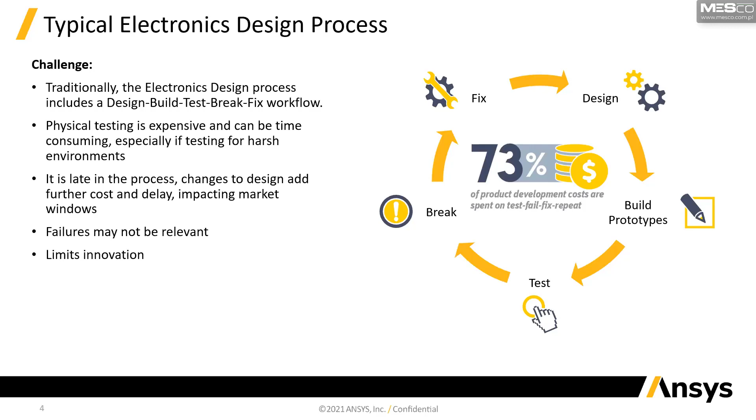And as a consequence, when it comes to producing reliability estimations for the product, these tend to be proven through this cycle or through an amalgamation of MTBF figures for components used in the design. What's really needed is the ability to reduce the number of test cycles and predict the failures early in the design phase using simulation, and gain back some of the time spent within this cycle, perhaps to innovate and develop new ideas. And this is where ANSYS Sherlock comes in. Sherlock uses physics equations and materials knowledge to provide a reliability analysis of the design before you get to prototype.

So just to be clear, Sherlock is looking at the mechanical shock and vibration and thermal risk to the board, the components and the solder joints on the board itself. It's mechanically induced failures, the reliability physics. And Sherlock builds on the information that's produced by the ECAD tools, so the Altiums or the Allegros and the PCB design tools. And through simulation, considering the environment in which the design is going to operate, it calculates a time to failure or reliability prediction for the printed circuit board assembly.

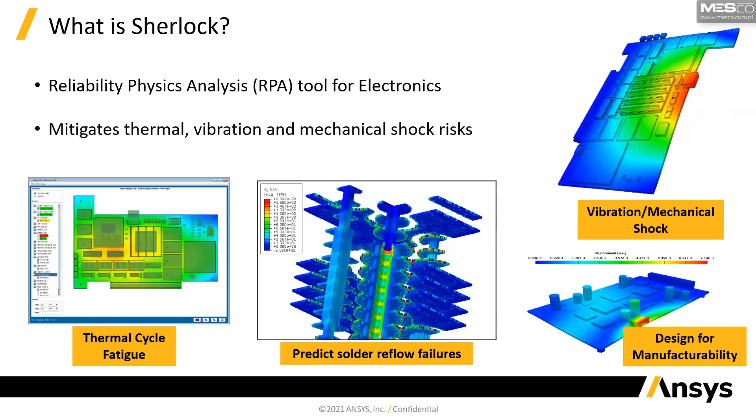What Sherlock isn't is a set of actuarial lookup tables based on MTBF figures. MTBF figures have been used for many years, and they're often empirical calculations from tests which are quite historic, based on uniform random failures and averaged over time, giving a constant failure rate. And this just isn't accurate, nor does it really reflect how a device operates in a changing real-world nonlinear environment.

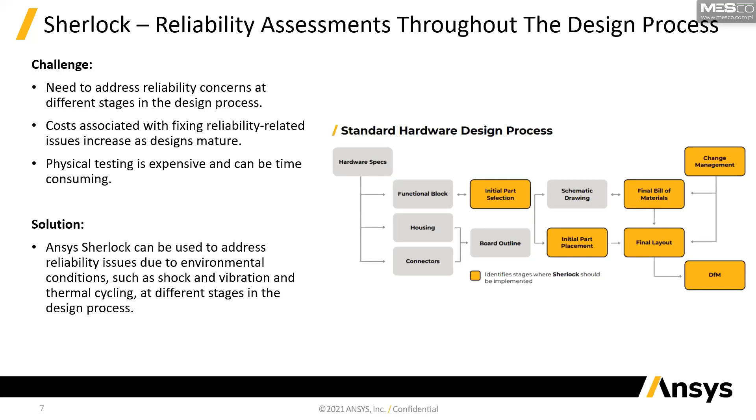So let's look at the process in a little bit more detail. A key component of Sherlock is the pre-processing capability, coupled with a huge component and material library. Often companies that are looking at reliability analysis for their products are already using simulations such as mechanical finite element analysis tools. And this actually can be quite a painful process, especially for PCBs, because while FEA is powerful, it's very broad, needs lots of inputs, often expertise.

And for a printed circuit board, you've got all of those components, all of the different materials of the components, the material of the board, and just the physical construct of it and how it's all put together. So it can lead to quite a complex process to create a PCB model in a mechanical analysis tool with all that material data and so on.

With Sherlock, you simply read in the ECAD file that's generated by the PCB layout tool. And within a few seconds to just a few minutes, Sherlock will virtually manufacture that printed circuit board into a 3D model. And the benefit here is our libraries. We have hundreds of thousands of components with all the material properties and sizes and dimensions associated, and we're adding new ones all the time. And Sherlock will equip the printed circuit board virtual prototype, if you like, with this data, from the stack up to whatever BGAs or QFN packages you might have.

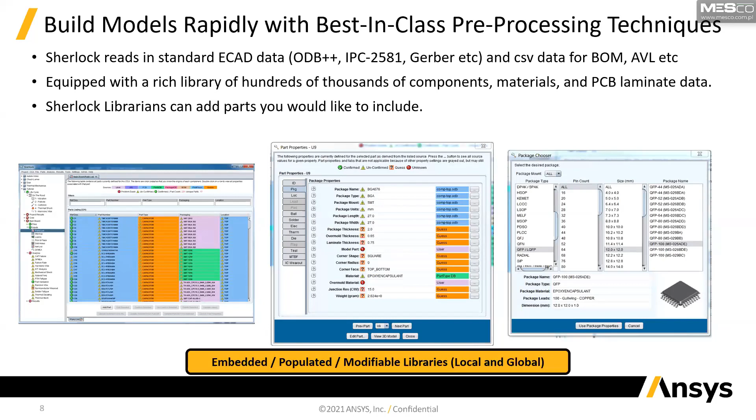The library is modifiable, so you can add to it at any time. Sorry, skip the slide. You can add to it at any time by yourself, or in fact, there is a team of librarians based in ANSYS who will take a bill of materials and create a series of models and components and send these back to you, so you have them available for your analysis itself.

Once you've got the board imported and a 3D model with all the components and material data assigned, the next step is to characterize your life cycle and the loads that the board is going to experience. These can be thermal, mechanical, or shock loads in the form of curves, or you can use industry standards, or loads that you use in your test suite, or even customer-specific loads as inputs for the analysis loading. And here, Sherlock will provide a GUI for helping you to define the curves, or as I say, they can be imported from text files or Excel files.

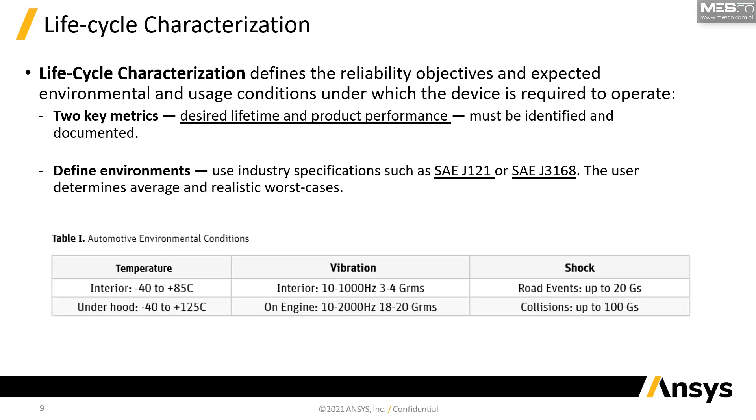And the reliability expectation is entered as a goal as well. This could be the requirement that you have of 5% failure rate over a number of cycles of operation, which characterizes the minimum operational lifetime that you want to achieve for your PCB. So with that all set up, with the virtual prototype, with the loading and the requirements, it's then time to actually do the analysis itself.

So there are several inbuilt analysis types within Sherlock in order to assess the reliability aspects of the board. The most common is solder fatigue due to thermal changes over the expected lifetime. So here, for each cycle the board is subjected to, there will be the expansion and the contraction of solder material, which over time and due to creep will cause fatigue within the solder and eventual breakdown. And what Sherlock is doing is calculating the time until that actually happens.

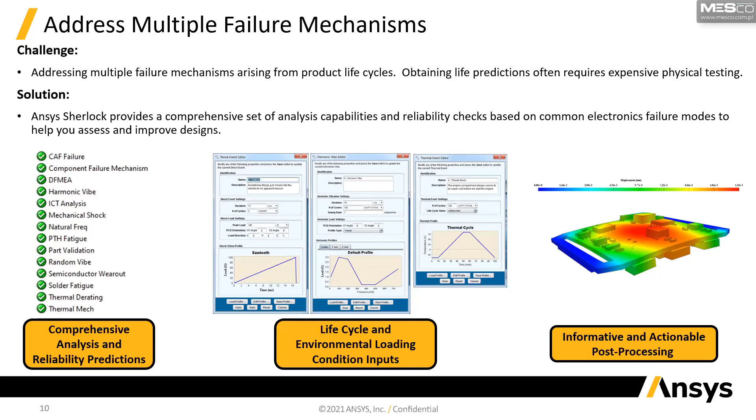Okay. So a typical example of this might be running a shock and vibration test. You have your generated 3D model, you have your sample shock profile, you apply that within the simulation. You can look at a displacement plot and see how much the board will bend under that shock. And you can start to look at a table which shows the individual components and which components are actually failing because of that. You can look at the life cycle prediction of the components of the board and understand where the problem is. And then you could start to run what-if analysis.

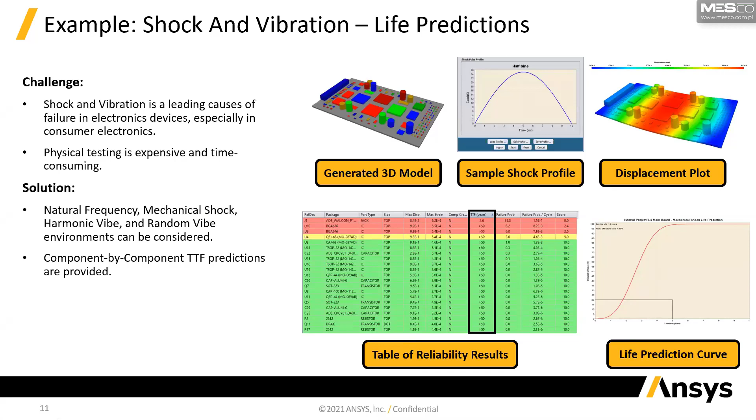And to show you some of this, I'm now going to pass across to Dan, who's going to show you how we import the ECAD, look at the bill of materials and associate it with the libraries, look at the component data, show the loading curves, run some simulations, look at the results, and do some analysis and so on. Okay, so Dan, over to you. Great.

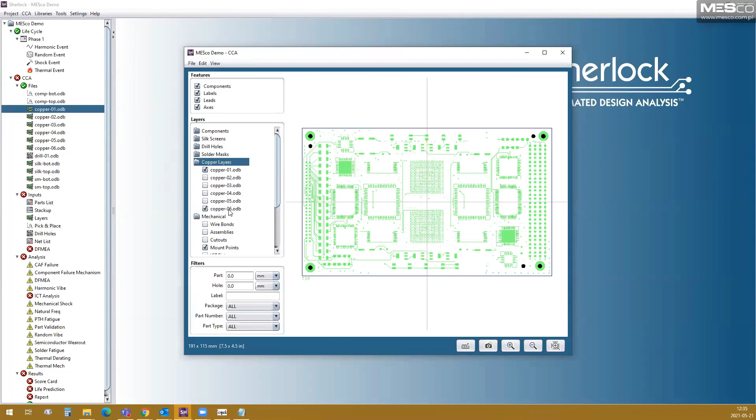As I said, all the components are in their spots. And these files here are not the ODB files; they are translated files that Sherlock has put into useful form for it.

The next bit of information we have, of course, is the stack up. This is the information that came in from the ODB files that has to do with the PCB. It's an 11-layer board. One of the great advantages is it has the copper percentage per area, based on the artwork that it found in the layer files.

And so that will change, of course, what the material properties are for each of these copper layers, because they're not 100% copper. If you remember, this one's 94.7, that was copper 2. You can see that one's almost completely covered. And that changes the effective material properties. These are close to actual just copper. But when copper is only 15%, it has different properties because then it's more copper resin.

This is important because here at the top, you see you have general effective properties calculated for your PCB. This is useful in a lot of different ways. You can see this later when we do a what-if analysis and change some things to try to increase the reliability of our board. Here you can see what changes you do, like say the in-plane and out-of-plane coefficient of thermal expansion of the board, that will help your solder joint reliability and things like that.

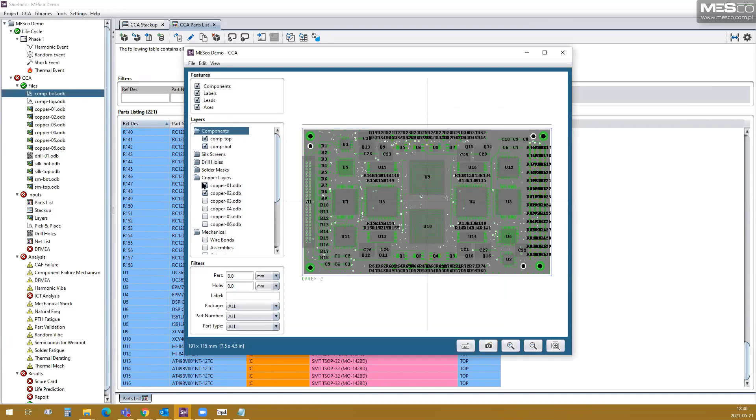There are other variations, you can get into the manufacturer and part numbers, and we can talk about that later. But for right now, you can see that a lot of these packages were figured out. Most of the things that come in on your board, when you look at the components, a lot of your RLCs, your resistors, your capacitors, most of the stuff on your board usually is going to be standard stuff, right?

A lot of the hard work is going to come in later with your ICs and your BGAs, when you really have any application-specific things, any new or interesting components that you are worried about. It's also generally where the focus is when you're running your analysis anyway. It's not on the simple RLCs.

But that being said, we want everything to come in and everything to be filed correctly. Now with the library synchronizer, you're going to have two libraries. You have your own local part library that you can save either on your computer or maybe a company server. And you have the Sherlock part library.

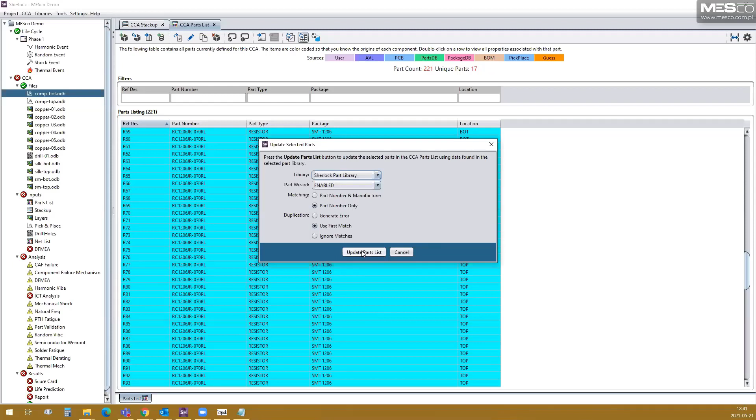And as Andrew said, the Sherlock part library is maintained by our librarians. It's got a lot of stuff in there and it's always growing, especially when people send in bills of material, like he said, to have them created as specific Sherlock library entries where everything's filed correctly with all the parts that we were looking

at before. Let's look at all of the dimensions and the mount type and what kind of ends it has and what the material is made out of. You can have all this done by librarians if you can't find it in the Sherlock part library. But it's not always just that it's not found in the part library. Let me see. It would be good if we looked at part libraries.

So let's open up the Sherlock part library. Oh, this is left over from before. So if you look for an exact match of one of the parts that was in here, I think it was this, exact match, and we list the parts. There are no parts found for this, but this part is in our list. And in fact, this part came out as green because also in the background, the

part wizard patterns. Now, there's another part of Sherlock that looks at parts and says, okay, I don't know this exact part, I know part of this part. Which I'll show you, you look for the prefix match. And you see, okay, so this is a capacitor from AVX. We didn't get the exact ending, but this part comes in a pattern. They name their parts with patterns.

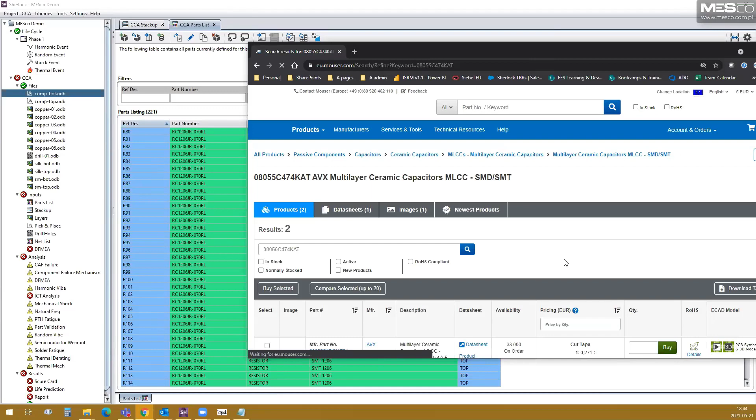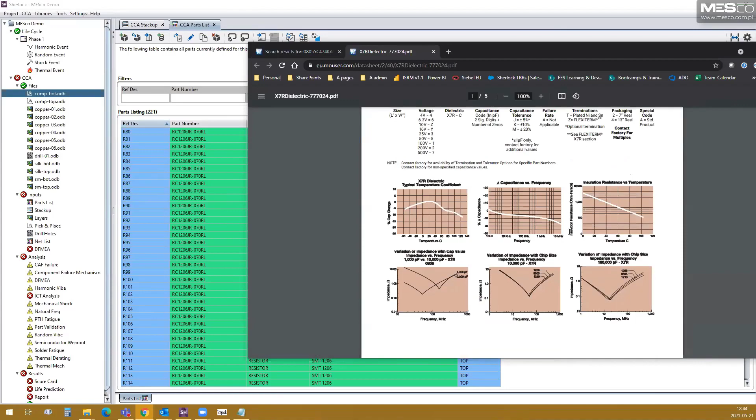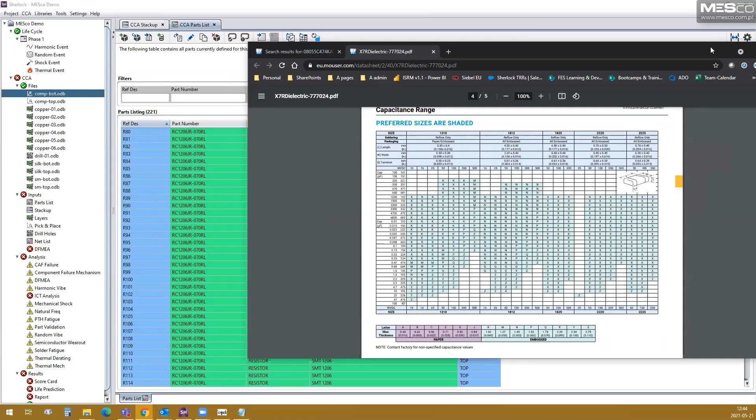So you just come here to Mouser and then grab the data sheet, open up the data sheet, and like I said, here's the pattern for AVX naming, which is why Sherlock already knew what it was. And then you can go in here. Usually, this is a simple RC, so the schematic is not that crazy. But then you get the dimensions from this, and you can go into Sherlock and fill in your own parts if you have to.

But generally, with a project, that's only going to be a couple. Most of them are going to come in from the part library, and especially after you've done a couple of projects, even your local library is going to cover most of it. So at this point, we haven't actually done much work. I'm just showing you how it works. But here, we've taken in our ODB file, we've taken in our parts list, we've synced our parts list with the part library, and we're almost ready to do our analysis.

The only thing is up here, of course, this life cycle that I was talking about at the beginning. This is where you set up the events that you're going to use, the loads for your analysis. We'll look at the thermal event here because I want to do a solder joint fatigue analysis. This is the standard one that comes in. You can edit it. You can change the minimum temperature, maximum temperature, dwell time in each, either by hand or, I think, by drag and drop.

And also load. You can save your own library of life cycles that you use for most of your projects, save them in your profiles, and then pull them up for each of your projects if you want. A lot of Sherlock stuff is done with CSVs and text-based files. So let's see, where is this? This is in data.

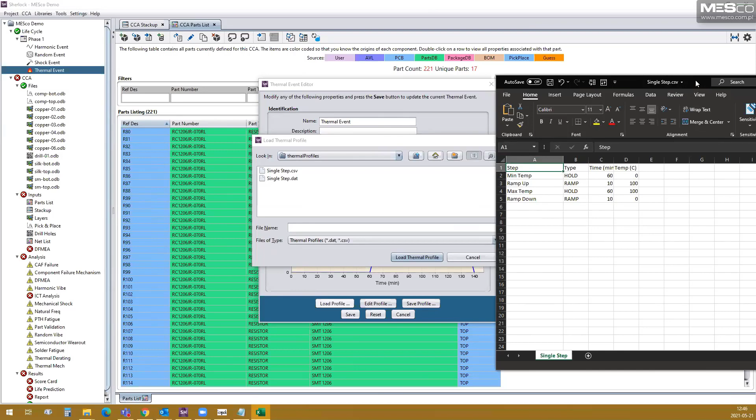Right. So if we look at the CSV, you can see it opens. This is just a standard CSV of a table of values, and you can make your own here. You can have Excel spreadsheets based on your loading profiles, or if you're in automotive and you have different requirements for different regions, different loading profiles and different use cases.

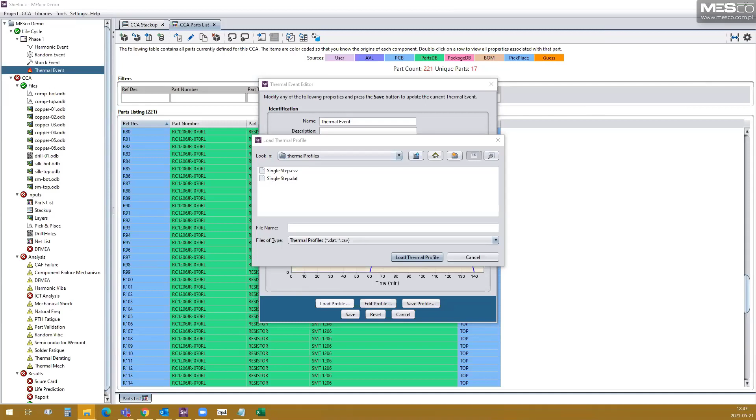Maybe you have storage. You have to do a thermal event of storage in a garage, and then a different thermal event for your average daily use. You can save all of these as spreadsheets and modify things and use them a lot easier that way. So we have this. You can even set your phases. This is phase 1, it lasts 10 years, and it does one 10-year time.

We can add a life phase, say storage. Let me set the time, not milliseconds, that would be ridiculous, 1 year. So this is a storage profile. What do we add? Let's duplicate this thermal event and say that's storage. Well, that's fine, we can do it there too.

This is so you can control the properties if you want to use them separately. Say we do 1 storage and 1 operation per day. If you did 1 storage and 10 operations per day, you can have them in different phases. At the very top for your life cycles, and this is that box Andrew was talking about on the results curve, you say your metric is under 20% probability of failure within 10 years. That doesn't change anything in the analysis, but it changes how the results are displayed, that box and the color coding.

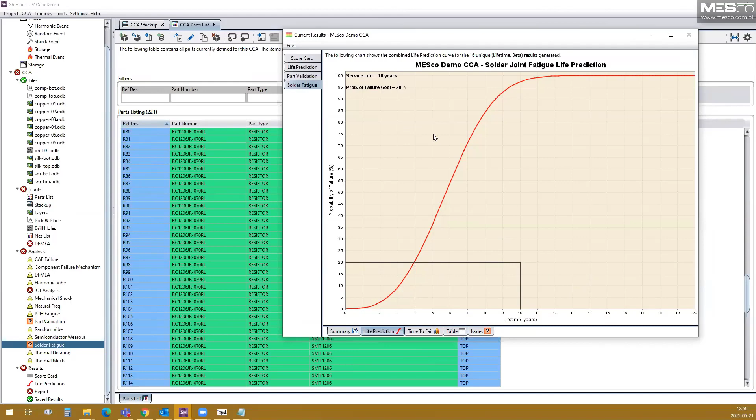You can also look at, by the way, so you have the red ones, which are the ones that tell you that these are your bad parts. The yellow ones are questionable; they're on the borderline. And the green ones, of course, are good. You can also grab a bunch and then say, well, let's look at just their life prediction. Well, that one was great. That one is underneath the 20% line before 10 years is up. But then, of course, the red ones, not so good.

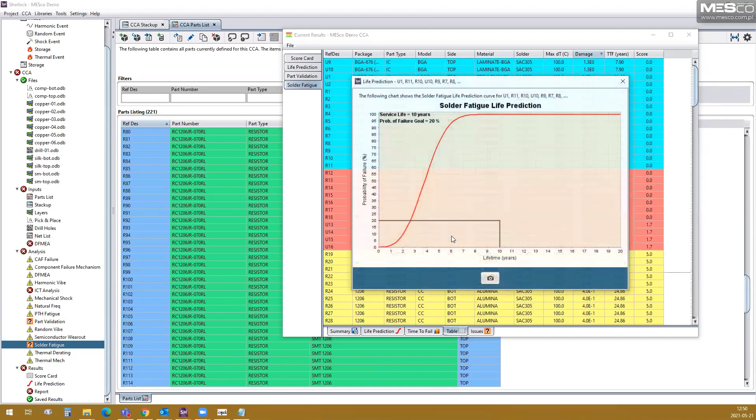And let's see, let me run this. It'd be easier. We could run storage, and then we can look at cycles to failure because there's only 1 cycle that we're running. See here, now it has how many cycles to failure for each of them and how much that translated into years. That's just because of the math that we put at the life cycle of basically how many cycles we are doing per year. And then of course, when we did one less thing, the only problem parts now are our U9 and U10 BGAs.

So let's save this. You can save results, give it a name. And then this is when you can get into your what-if analysis that Andrew was talking about earlier. Let's close this. This is our current results window, and we'll open this in our results viewer to have next to us while we do some changes.

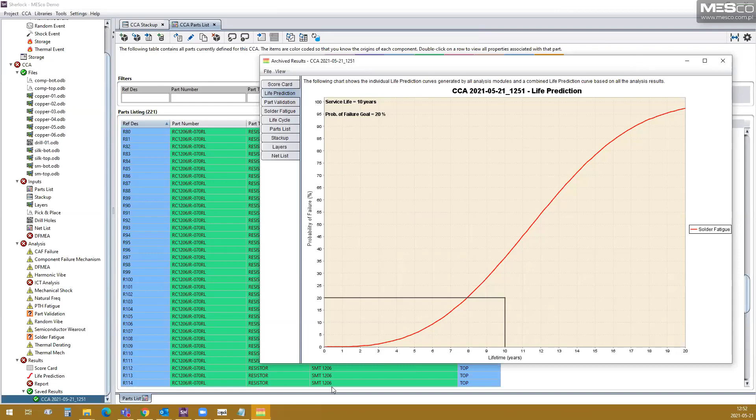It's a great little results viewer. You can also export these and look at them externally outside of Sherlock, where people can look at the different curves that you have. We only did one, so we only have one curve. Andrew showed you in a previous PowerPoint that you will have one curve for each of the analysis sections you run, and then the combined curve that shows your overall, which is a statistical combination of the other ones. We did solder fatigue, and here's our table.

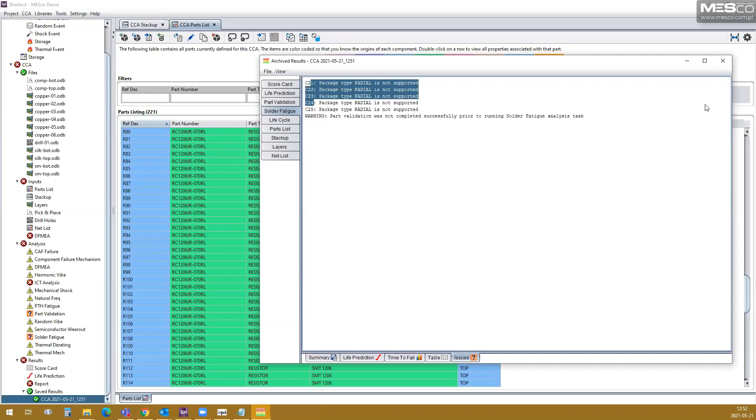By the way, issues: sometimes I didn't check the package types for some of these. It's marked as radial. These are some of the things that you can edit while you're going through your parts list to make sure everything goes properly. But these small capacitors, I wasn't checking those anyway because I knew from experience with my own products that this wasn't my problem area.

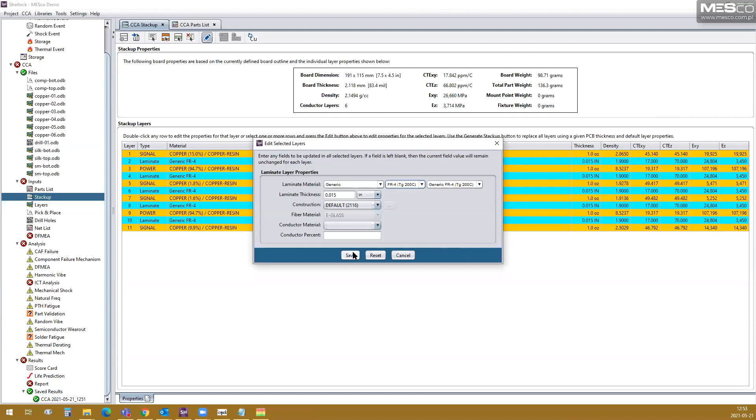So we have these saved analyses, and we could go back to our stack up and say, what if we grab all of our laminates and edit them, and instead of just our regular generic FR4, we went with an FR4 with a higher glass transition temperature? Maybe that helps our situation. Just save right there. Everything's been changed. Then go back to our solder fatigue, run analysis, save and run.

It's done. Now you can see we've already improved; some of our danger zone resistors are out of the danger zone. They're in the green now. We still have a problem with our BGAs, but we've already seen an improvement of our design in just a couple of seconds.

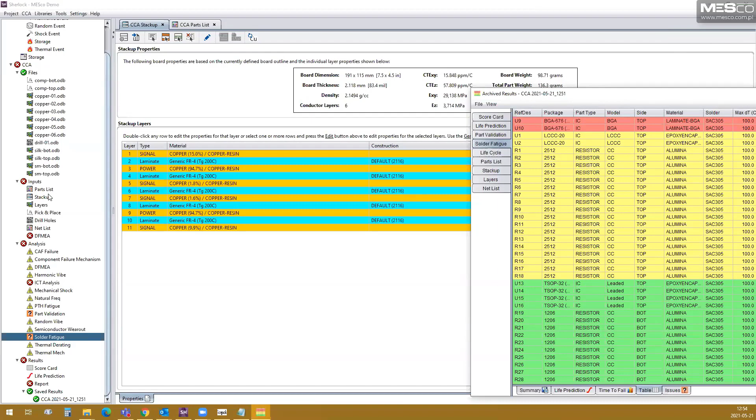There are other things you can do, like in your parts list. Those were BGAs. Who was in trouble? 9 and 10. These guys are both the same 676 BGAs. Like I said before, a lot of this also has to do with the precision that you have at the time when you do the analysis. These are standard dimensions for a BGA of this size and number.

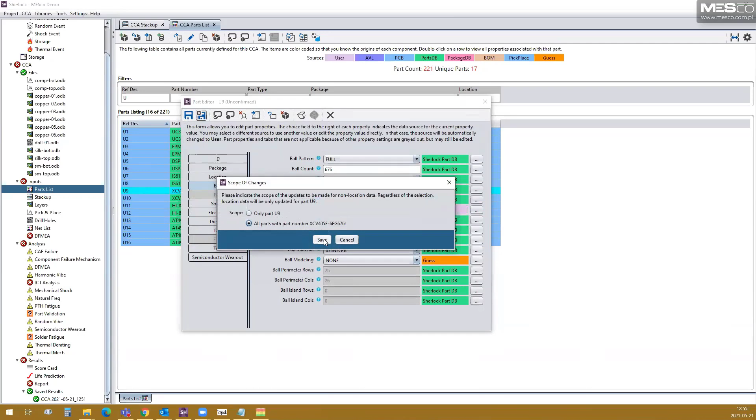You could say, well, you did your failure analysis once you had some components and found that the ball diameter, this is on the package and this is on the pad, maybe the package diameter was in fact 0.5 and not 0.4. Then you save that, and it's for both of those. I was editing U9, but U9 is the same as everything with this part number, so change all of them. Then we go right back to solder fatigue and run it again.

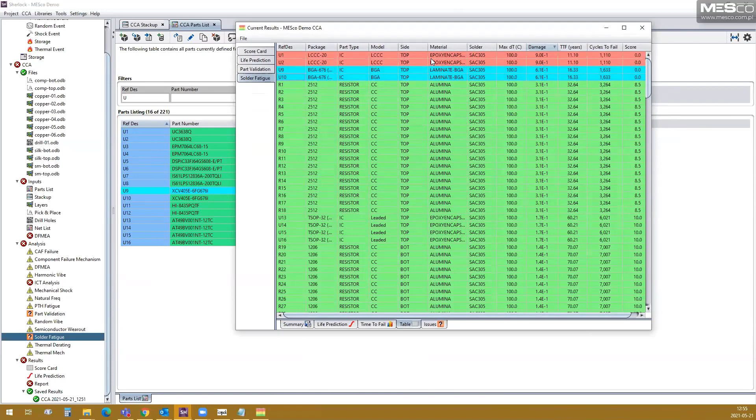And it's done. Okay, U9 and 10 got better. And U1 and 2 are a little bit worse. Oh, because those are also the same? No, those are LCCCs.

Could be that when you mess with a component, then other neighbors will also get damage transferred to them if you make something more robust, right? So you can see now how you can do very quick what-if analysis, changing things.

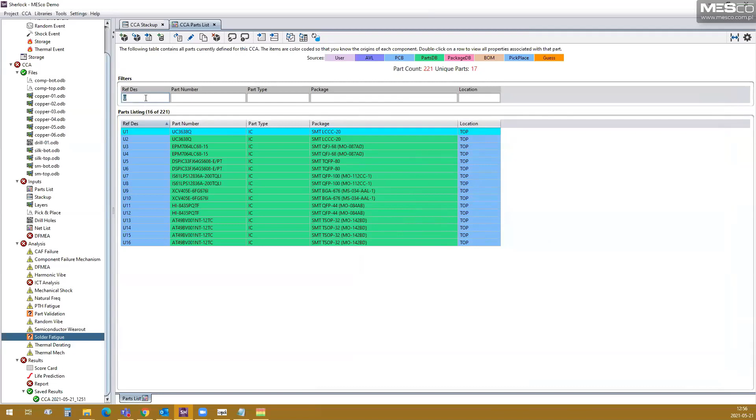And the last one, the best one, I think, is that we set up our storage situation that goes from 0 to 100 degrees. And does everything go from 0 to 100 degrees? Probably not. This is like, say, what the garage temperature would be, for some reason, 0 to 100. That's what the thermal chamber is when we're running it, right? But that's not what the components are.

Now I picked storage, so there's no components heating themselves up during this, but it could be that components are heating themselves up. Or of course, things hold heat and they store heat. So you cool the chamber down to 0 degrees. Do the components go all the way down to 0? Depending on how long you sit there, maybe not. And this is where you can do things like, now let's add a file.

We have a thermal map, which is mainly for, let's see, view file. So we have ourselves an infrared picture of our board during a test. This works best with infrared pictures. Theoretically, you could also do this with a thermal contour that you got in Workbench. And we'll look at that a little bit later when Andrew talks more about the integration in ANSYS workflows with other ANSYS products.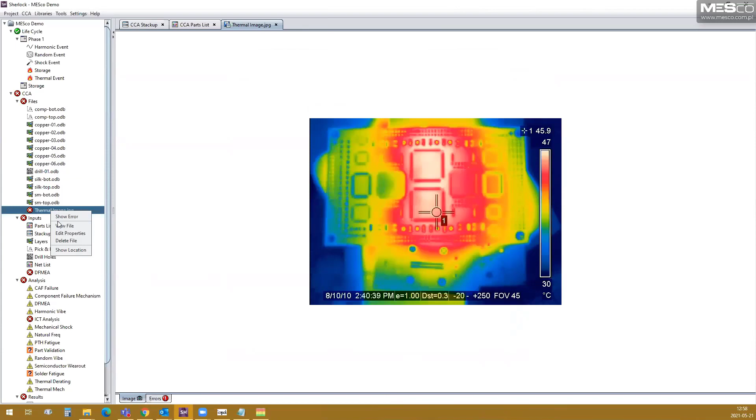So we take this. This is what it looks like. And how do we use this? Edit the properties of this file. This is our repository of useful files for our project. You can always go in here and edit all the properties of everything and how it's used. And you can also use it for nothing, say it's unknown. But I put this one there on purpose because I know what it is. It is an image thermal map.

And let's set this up. We look at our legend here. The minimum temperature is 30 degrees. The maximum temperature is 47 degrees. And now we have to pick what point in time this picture is from. Let's say this was the minimum in storage temperature because, for the sake of argument, some of the stuff held heat longer and didn't actually get down to 0 degrees. So we'll apply that there.

And now we have our thermal image map that we need to edit. Align the board. I don't know if you guys have used any of those apps where you can take a picture of a document instead of using a scanner these days. Same idea. You just move the corners around the thing so that it knows where it is. So now we have the board lined up, and then align legend.

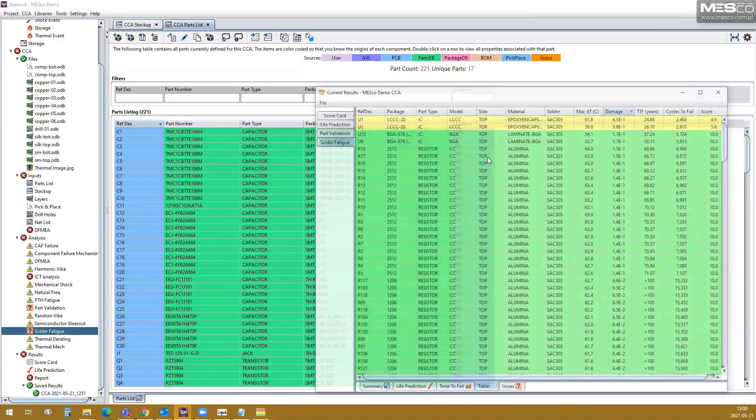And you remember from before, in our saved results, all of our max DT was 100 because everything was theoretically going from 0 to 100 degrees. And now we have different max DTs for each component because we specified their own different minimum temperature. You can do this for maxima, for minima, for all of your different thermal profiles.

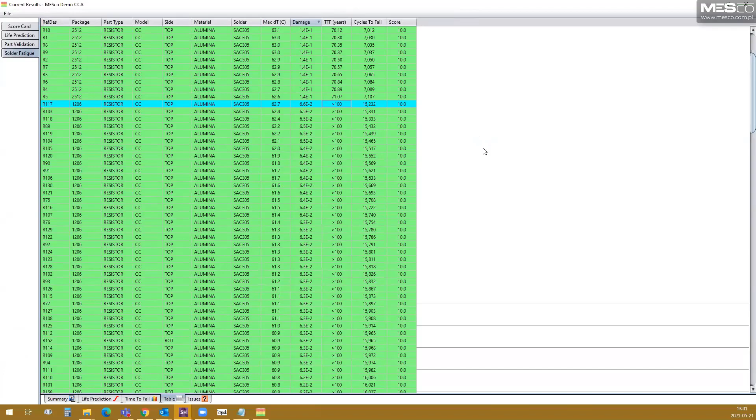If this works now, this case works best, I think, with the picture from experimental results. Like I said, theoretically, you could do this with a contour from ANSYS Mechanical. But this might be a good time to send it over to Andrew so he can start to show you some of the integration. Before I do that, sorry, I tried to get you ready too fast, Andrew, but I wanted to say you can add a file. Again, that's what these are, the thermal maps CSV. A lot of things that you do in here are based on CSVs and text files.

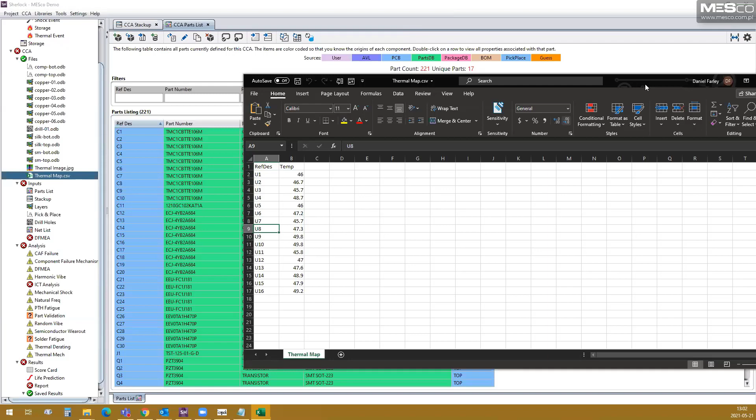So we can open a file here, but if you've used a thermal analysis or any analysis in Workbench, you know that you can take your components. If you did a thermal analysis of your board, you can just pop out an export sheet of the results, an average or a maximum, depending on how conservative you want your analysis of component temperatures to be. Then you can make them a chart here and also put those in as a thermal map, and better control what the actual minimum and maximum temperatures are on your components.

So that's a good time. Andrew, if you want to take it away and give more background on the integration into other Workbench products.

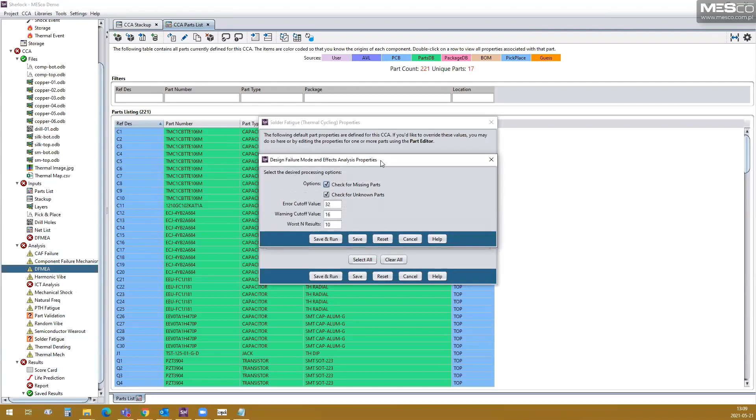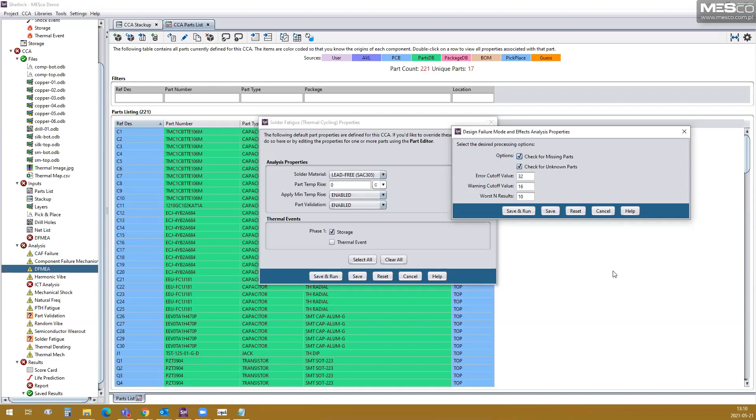The DFMEA tool. Let's see, where did I put it? The DFMEA tool is mostly, I believe, just a lookup table where it looks up statistical known values for each of these components. Like I was saying before, this is one of the ones, like semiconductor wear out, where it is important which manufacturer you have instead of just the package type. But most of this is just, I believe, a statistical lookup. It's like a design check, I guess.

Let's assume I have a component available in through-hole and surface mount versions. Will Sherlock help me estimate the lifetime and choose which components to use? Does it take into account how components are assembled, even if they are glued? It can, yes, depending on how you're building it. If you just want to look at these two components, you can put them next to each other on the board, or you can do two different boards. You do it one way, save the results, and then you do the other one.

You go into your, let's grab a through hole. And then for the leads, I should put it on edit if I want to edit it. Was it a through hole? Well, no, now it's just a leadless capacitor on top, and then you can run the analysis again now that we've changed the lead types, and compare the results and see which is better.

As far as gluing stuff, there are other things you can add. There are ways to add potting and underfill. With glue, that might be better with what we're about to do in the transfer to Workbench, where you can add more details, play around with your geometry a little bit more and do a more focused analysis on certain components.

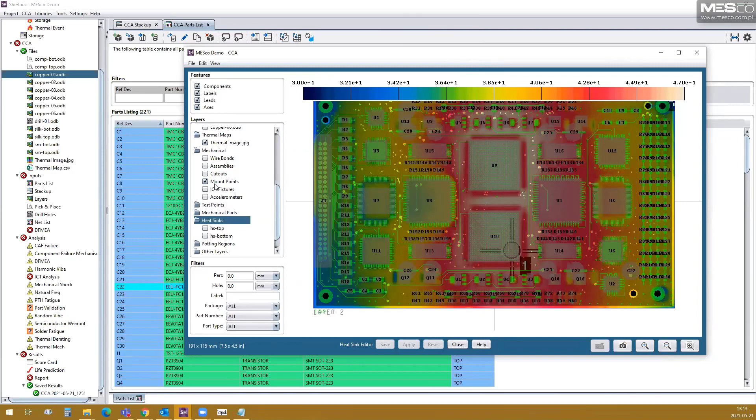And can you show electrical in part parameters? I'm not sure exactly what that is. What do you mean by the electrical in part parameters? The electrical, okay, I got it. Maybe it's this. Right, this is maybe a little counterintuitive, because it says that you can have a max rated power, and then you have an applied power. Max rated power is 0.1 because that's what's in the data sheet.

Max applied power, if you put something here, it doesn't have an effect on the analysis, because at the moment Sherlock does not have the ability to run electrical loads from the components themselves, but it is good for bookkeeping, and it's listed. And when you transfer stuff into mechanical, like we're about to show, this also doesn't apply there, but you have the information. This is mostly for bookkeeping.

One other comment I would add is that with the integration between Sherlock and the ANSYS Electronics Desktop, which has the other electronics reliability tools in it, such as SIwave and Icepak and so forth, where some of these values are used, there'll be a consistent component model across all tools. So this is potentially for future use.

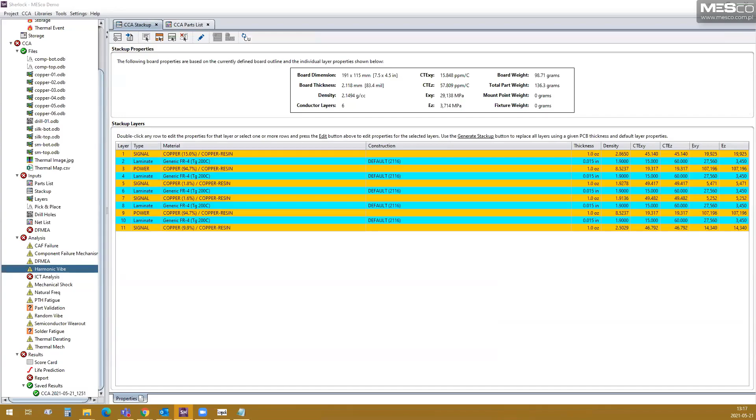Okay. So let me share my screen. There's a couple of additional things that I wanted to point out. Hopefully everybody can see my screen again. Thank you, Thomas.

This is a simple case study example, in slide format. You might have your design here; this could be a radio circuit or something like that. Normally when you put together a printed circuit board, things like connectors and jacks get placed first because they need to be accessible for use. The next step would be placing the complex integrated circuits. These are the most important parts, because these days it's a one chip does everything type approach.

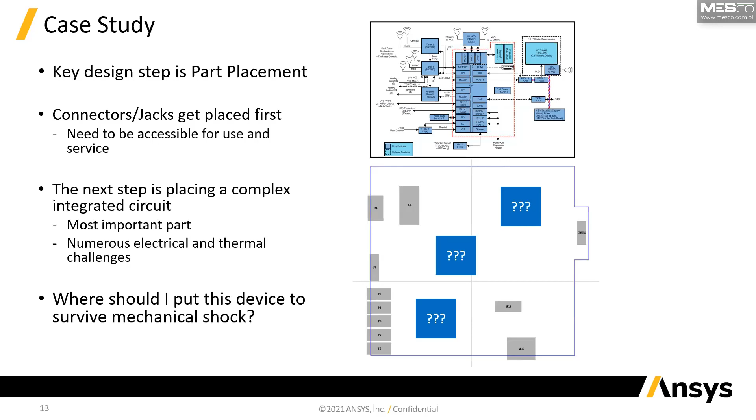So the question is, where would you put this on the board itself, and where do I put it to survive something like mechanical shock? This is a typical use case for something like Sherlock. You'd put it on the board, and then you'd run your analysis based on the loadings you've got.

And as you've seen from Dan's demonstration, you would get your Weibull curve. In this particular case, we're looking at the mechanical shock, or the Weibull curve due to shock of the board. And you see we're not actually achieving our lifetime requirement.

And if we actually look at the displacement map, we can see that perhaps we've placed the component right bang smack in the middle of the board here, which might seem like a good idea because then we can place ancillary components around it. But actually, from a mounting point, maybe we've just got mountings in the corners. This is the worst place to put it.

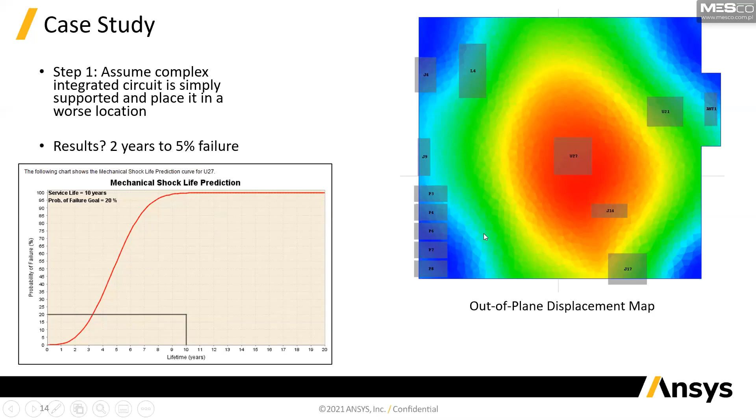One of the things you can do within Sherlock now is that what-if analysis. So you can decide, what are you going to do? Should you move the component to one side and then quickly rerun the analysis? Does that have an effect? Or should you strengthen it? Maybe you put in some underfill or something like that, or maybe you put in additional mounting points.

Okay. The point is, with Sherlock, you can do all of these things within Sherlock itself, understand exactly what the fix to the reliability issue is, and then feed that back into the design process before you've taken that step to even create the board itself. So you're mitigating the design risks as they happen.

So I just wanted to highlight that, as Dan was showing with the thermal side, even with mechanical shock and vibration, where we are actually doing FEA analysis ourselves, and we're creating a mesh over the board and the components on the board and the leads and so forth, it works very quickly, and you can still do the what-if analysis within Sherlock and then feed the information back.

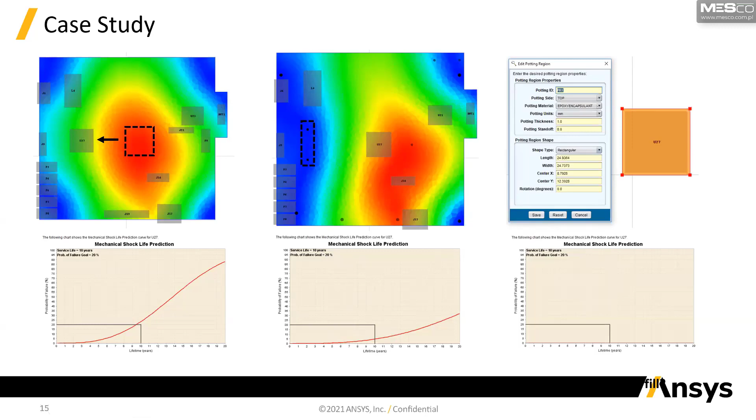So just looking at how Sherlock integrates within the rest of the ANSYS PCB reliability portfolio. If you like, Sherlock can be seen as a pre-processing way of getting in and doing further analysis. So you've got the inbuilt analyses in Sherlock itself, but if you want to really start to analyze in more detail, then you have the ability to export into Icepak, which is the ANSYS thermal analysis tool, looking at CFD flow, thermal flow across your board.

If you wanted to put fans on and have heat sinks taking away some of the heat, you can have a dynamic heating model, which you run from something like SIwave, where you take the dynamic thermal properties of the board when it's powered up, powered down, and runs under operation. You can take that into Icepak to look at how the temperatures change, and then feed that information back into Sherlock to understand how that would affect the reliability of the board itself.

Similarly, we can export with one click from ANSYS Sherlock into Mechanical, where again you can run structural integrity analysis, and you can start to look at things like elastic mounts or cases and assemblies. Maybe one of your cables is a particularly long cable that might be pulling on a connector, and you want to see the stresses and strains that long cable is going to be placing onto the connector and onto the printed circuit board. Then you would go out to Mechanical to really analyze that. And we have these links to ANSYS Mechanical, to LS-DYNA, and so on to allow this detailed analysis.

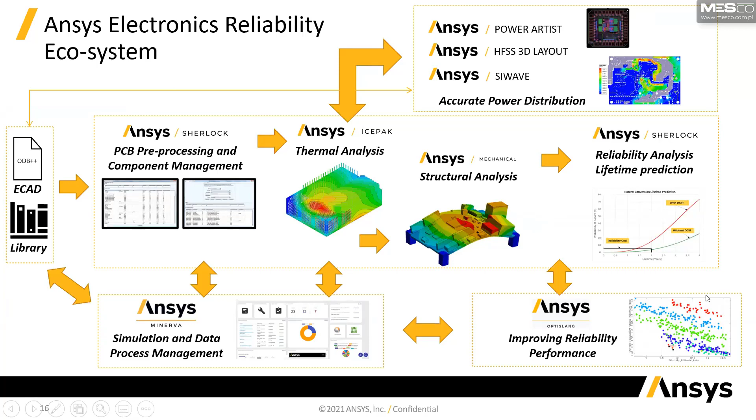Okay, just a couple of notes about these integrations. So Sherlock exports to classic Icepak. I mentioned briefly that we are also connecting through to the ANSYS Electronics Desktop, and thereby we'll be able to export EDB models out of Sherlock and into there. So there's better integration with the likes of SIwave, where you could potentially use the same component data that comes in from Sherlock in SIwave calculations and so on.

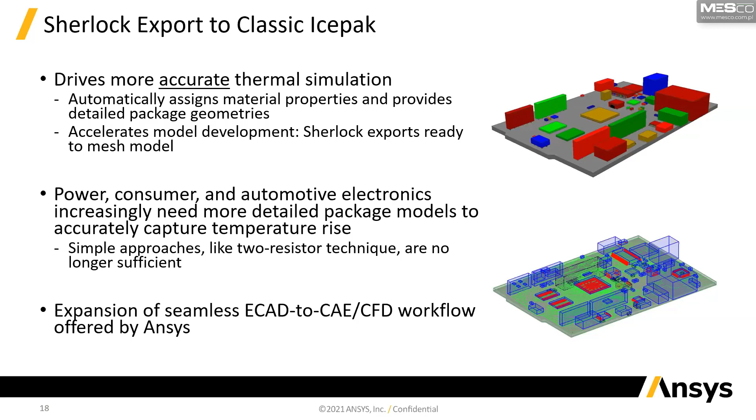And the idea is, by exporting into Icepak, you're driving this more accurate thermal simulation when you're really looking at details and thermal flow and so forth across the board itself, as that becomes more important.

Similarly with ANSYS Mechanical, there's a good Workbench integration, which simplifies and expands on the mechanical capabilities of the tool. So there is actually built in a pre-processing block and a post-processing block, which allows you to read in the Sherlock project, set up any analysis in there, but also allows you then to put in your different types of analysis and bring in different features and so forth.

So maybe you've got housing constructs and things that you want to bring into a broader mechanical analysis, and then you can feed the results out of that into a post block and get the reliability figures out of Sherlock for this larger system.

And across a design team, you'll have the electronics engineers, PCB engineers, thermal engineers, and so on, all wanting to use their particular tools and look in detail at their particular part of the analysis. And Sherlock enables this by allowing this sort of integration and this sharing of the 3D printed circuit board virtual prototype model, if you like.

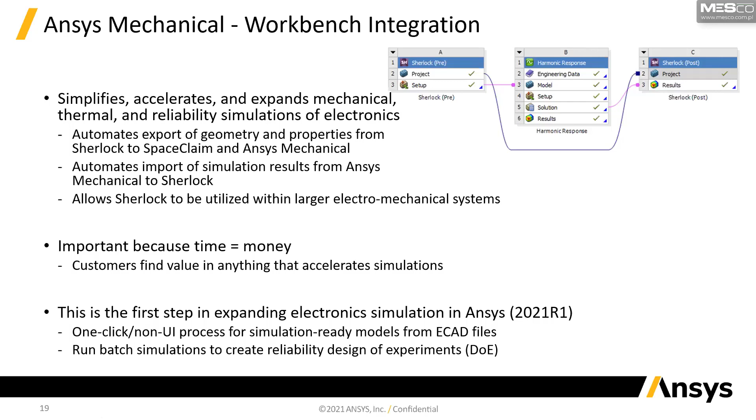Okay, we're very quickly going to go back to Dan. He's going to show this easy export into Workbench and so on, and then return to the presentation for a quick wrap up.

Great. So we can start with, as I said, any of the analyses which make an FEA analysis if you want to export the model to Workbench itself. And then you can generate it here. We're not going to, which takes some time, and I guess we want to get to the Q&A section soon. So we will just export here. Actually first I want to do a Workbench file. Let's just call it export.

So you can see there are a couple of different options that you can pull from. You can even get a straight APDL script for any of you who are into that, which I am. A CDB model, the Workbench journal file, step file just for the geometry, and also Icepak. Here we go.

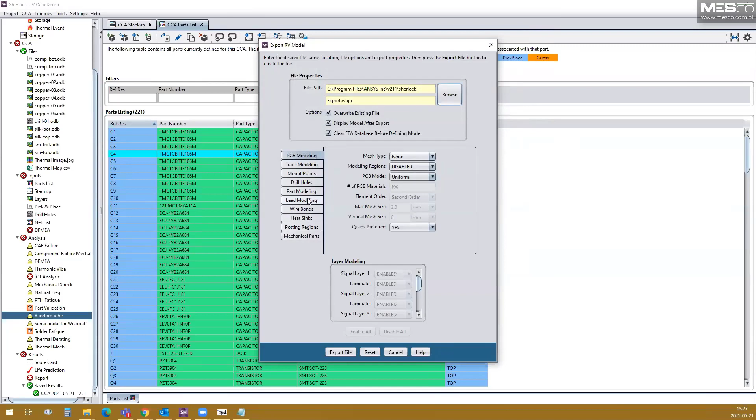And here you can pick how complex you want your model to be. In the interest of time, we're not going to have some things like the leads and everything, but we'll have the PCB and the components. And then we just export. It takes a while because what it's doing in the background is exporting that step file that I mentioned before and making a Python script basically that ties it all together.

Sometimes people get a little frustrated at how slow ANSYS works sometimes. And a lot of this has to do with the interoperability that I mentioned before about working with text-based things, which helps because then it's also modifiable when you need to. I always say that one of the biggest strengths of Sherlock is that it's highly customizable. And one of the biggest challenges for Sherlock is that it's highly customizable. So it's a power. You got to know how to use it. And sometimes you got to pay in time while you sit, like now, as we wait for everything to get translated.

You can see it has built in the Workbench layout, all of the engineering data. That was all the material stuff that we had before. And as I mentioned before, on the stack up window, you can see the effective materials box at the top. And so those are the materials that are going to be in our board here, because when we exported, we selected just an effective brick for the board.

You could also actually export it to have all the layers of your PCB be separate, and have your laminate and your copper, because sometimes you need to know what's going on in the board. There's also a different workflow where you can do different types of trace mapping, because you can imagine if you have all the traces on your board and the length differentials between the traces in your giant BGAs, the mesh on there is going to be almost untenable, depending on how much time and computing power you have at the moment. That can be a huge pain.

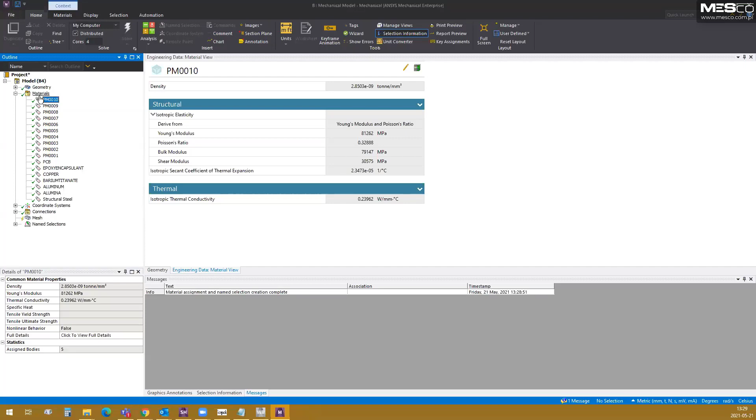And here we have all of our materials that have been shipped with it from Sherlock. And let's see, all of our components are here. We don't have any leads because it's faster when you do it that way. In this case, you could lock it down at the corners, you could run a vibrational analysis, which of course you can also do in Sherlock.

But in this case, now that we have it in Workbench, we can do more tweaking if we need to, depending on our design. We can go to your connections, like one of the questions mentioned, and we can change the contact regions, maybe it's contact and no sliding, maybe it's glued. We can do things like this to change and see how the analysis changes when we do that.

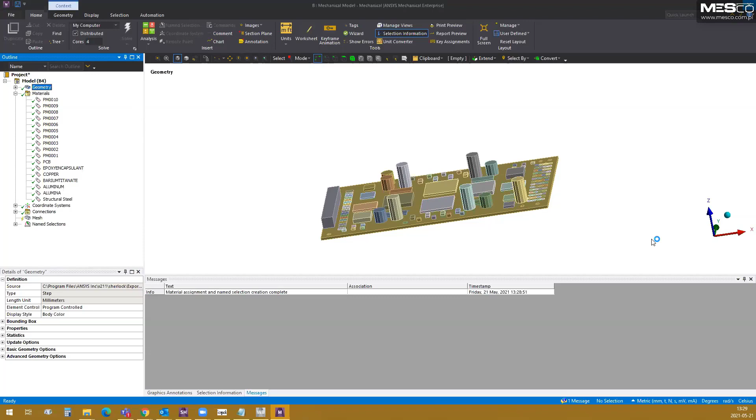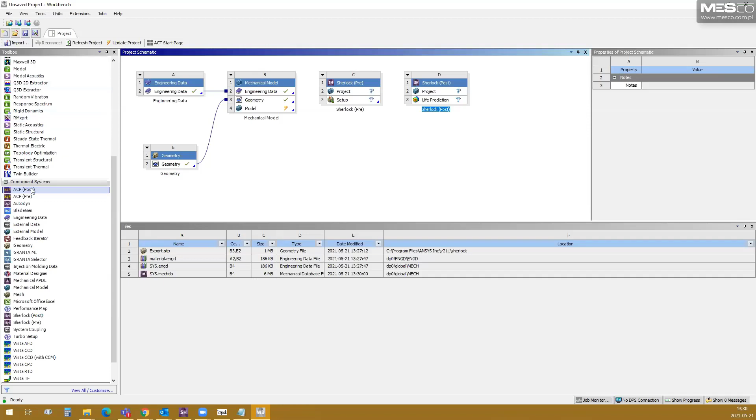And so that was the old and still the main way of exporting the model from Sherlock to Workbench. And one of the new things I think with 2021 R1, or it might have been 2020 R2, I don't remember, but they added in these blocks, the pre and post block. And so now you can have, let's see, actually, if we wanted to put in, there's like a modal.

And let's see, in 2021 so far, the only way is to import a project. I think in the next release, you can start fresh from Sherlock here. But here, since we already have a project that we made, we can import it this way. And then you would take a bit of time, send the setup here, and then make sure you share this project from the beginning to the end.

The reason there's pre and post is because you take everything from the project that you had, you take all of those analyses that were here, and you can do all of these and more, or in more detail than here. You can play with your mesh better in this case. Maybe with your leads you say, I don't like the meshing on that J lead, I would like it to be tighter. Then you come in here and you make a tighter mesh. And then you send the solution from your analyses.

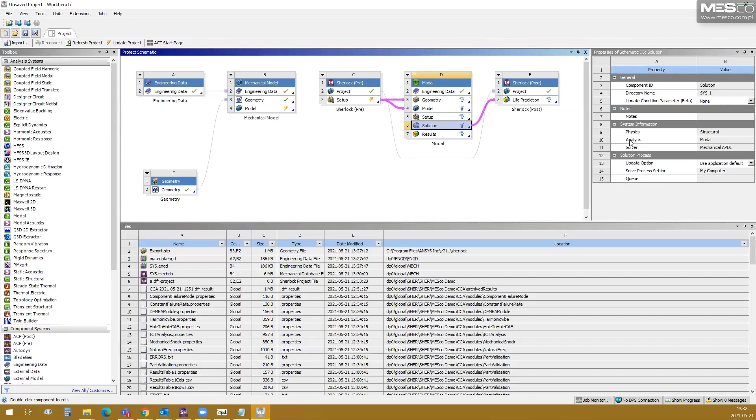Let's see. I think that was right. Well, that's the Workbench one. I mentioned before, this is not a baking show, but I do have this one already imported, because the Icepak one actually takes a lot longer. This one has to read in a whole script, and I don't know if any of you used Icepak. This is one of the slower analysis tools in the family.

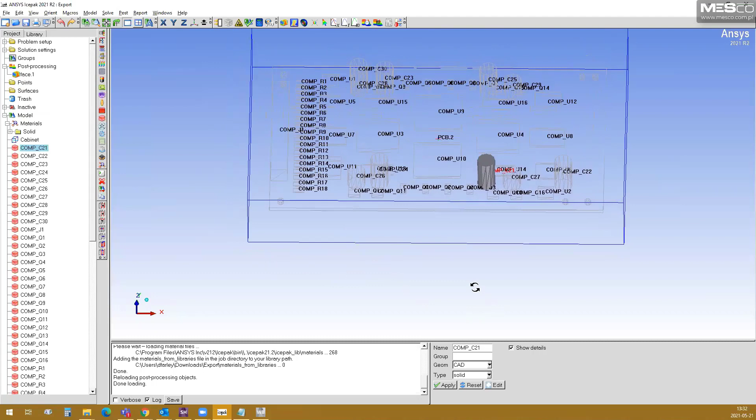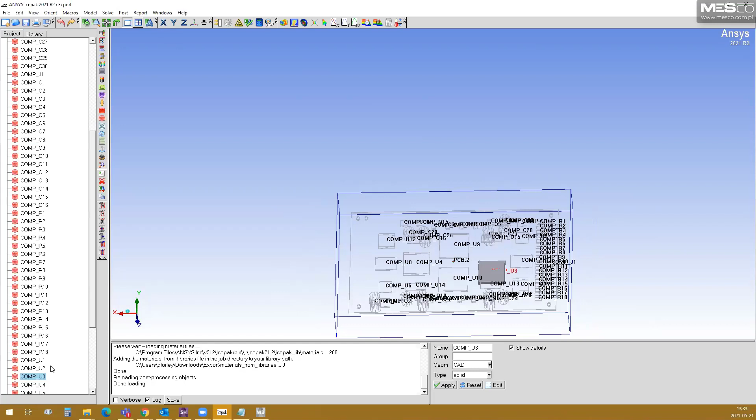But you can import it into here and say, if you have some fluid cooling going on underneath, you can import your board here. You can see all of our stuff. And then, in this case, one of the reasons I wanted to use this pre-baked version is because you could also say import. Oh, that's the bottom. That's why we can't see it well.

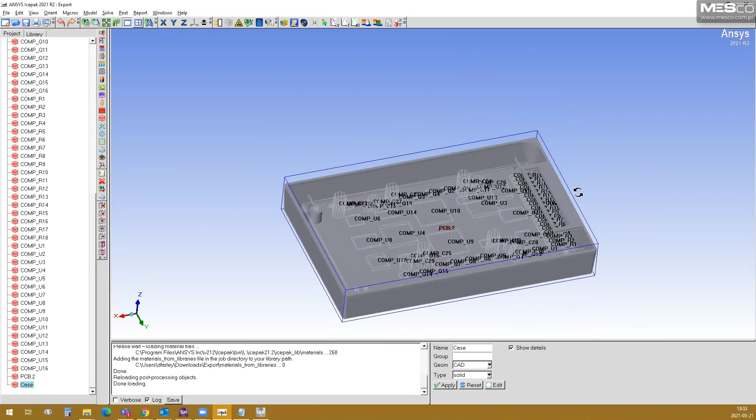Now you can see that you can bring in a case like this in Icepak, maybe you have an opening at the end and you have air blowing through to cool it and stuff like that. So you can get better results for your thermal situation this way. And then you can get your thermal contours at the top. And as we were talking before, you can take those data and import them back into Sherlock for more specific thermal states, when you do your solder joint fatigue analysis or what have you.

And let's see, I don't have the Electronics Workbench version, but that is also coming if I'm correct, Andrew. What's the state in the next release, 2021 R2? I know that there is more functionality in that one, and I think it also is wrapping it into the Icepak inside Electronics Desktop better. That's correct. So 2021 R2 will have our first integration of Sherlock within the Electronics Desktop from ANSYS.

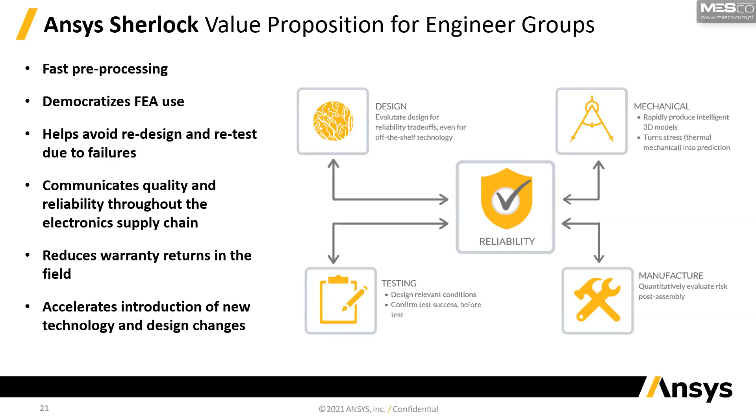And this allows quality and reliability to be communicated through the electronic supply chain, providing these reliability figures up and down the design into the next department, and also to end customers. In fact, there's even a locked IP model available to enable sharing of the reliability data to a broader and bigger system analysis. And of course, it enables understanding the reliability of the product in the real-world environment, reducing the chance of any warranty issues.

Okay, just a couple of references and examples. Continental Automotive are big users of Sherlock. All the circuit boards they develop to go in cars and vehicles are run through Sherlock and tested in terms of reliability. Similarly for Valeo, and there are papers available that you can access through the internet, which go into how they're using Sherlock.

We have Danfoss Drives, who use Sherlock and have benefited significantly from reduction of the time to test their designs and build them, and also finding problems, which means that they reduce their time to market for any new products that they're creating.

Western Digital have done similar things. They've managed to eliminate a number of design reviews and a number of test vehicles for their disk drives and so forth, getting to market nice and early, saving costs as they go through. I've mentioned Continental already. Other automotive car makers utilize Sherlock in looking at the power electronics in particular, and how those are used. And there we go.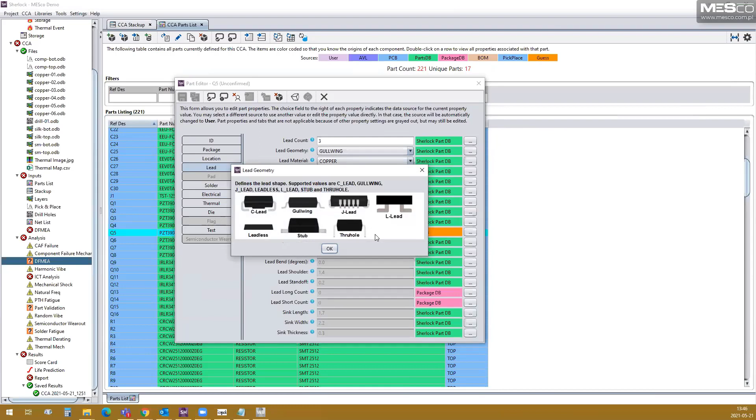Yeah, as you said, there's a bunch of different lead geometries that you can pick from, and then you can go into your lead height. It tells you what that dimension is and how you put it in. Well, we did a gull wing here. So you can change your geometries if it has to do with leads.

If you pot the entire PCB in resin, you can actually also do that. Let's see, edit, where's my potting regions, right? So add a potting region.

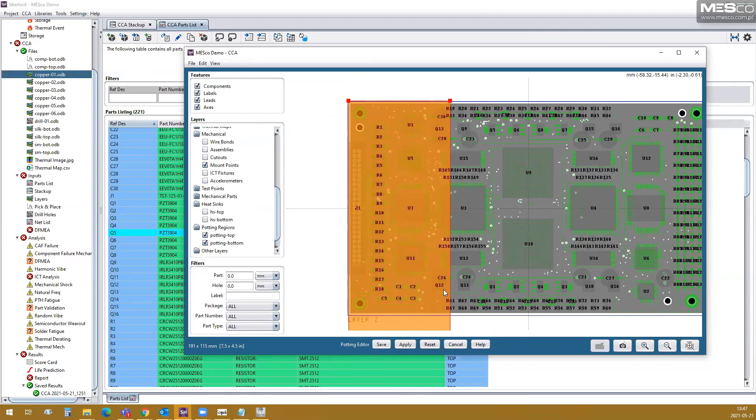Check that out. You know, the whole thing is potted. Well, I get. Yeah, and then you can, you know, so you say, well, you can do one on the top and one on the bottom, and how thick it is, potting standoff, all these things, basically. You can add your potting to the board.

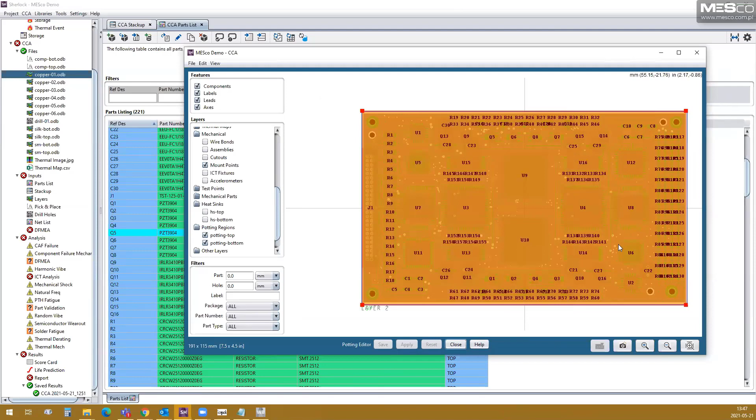And then, yeah, if you do anything that's like, you know, like you said, there are special conditions for a lot of the space electronic things, soldering by hand. Like we were shown before, this can change sometimes your solder joints. This has an assumption based on the fact that a solder joint thickness is going to be probably, where am I going?

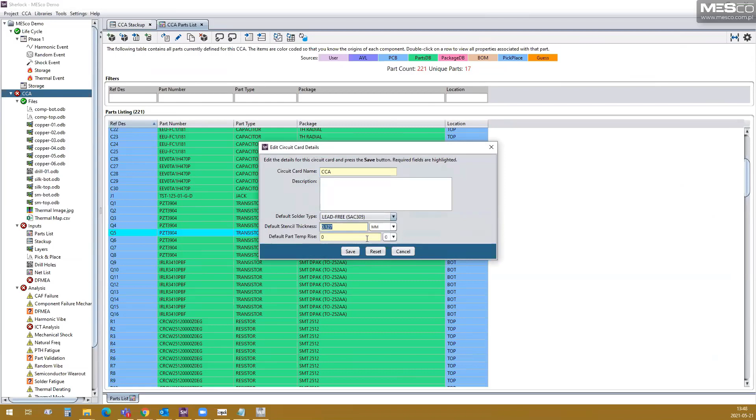Part properties. So this is printed, say, maybe by reflow soldering, and there's a stencil thickness like that. And so the solder joints generally will be half that size. And so that's the default that it gets for all the solder joint thicknesses for this board. You can change that. Or if you're doing stuff by hand, which means a much less uniform and less controlled system, then you can go to each of your components and, like we were saying before, you can change the solder dimensions, what the thickness is for each one, and even the pad sizes

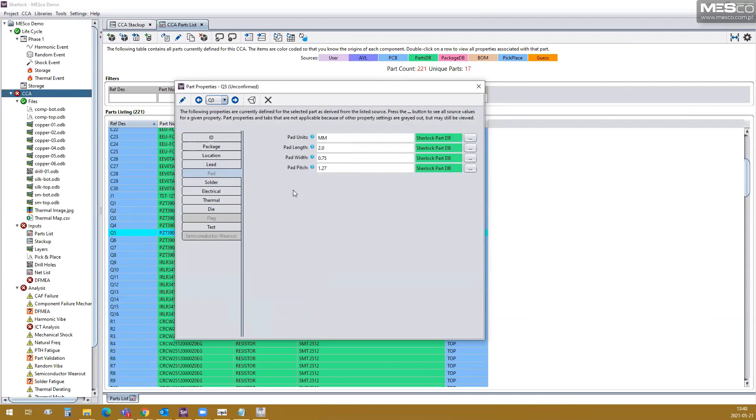too, because these also come in standards from the parts library or from the data sheets that I showed before. The standard suggestion by the manufacturer of how big the pad size should be for each of these components. But maybe for increased reliability, you have bigger ones. So you can come in here and you can change these. Again, you can change all of your lead geometry and your pad sizes depending on the special needs for your components.

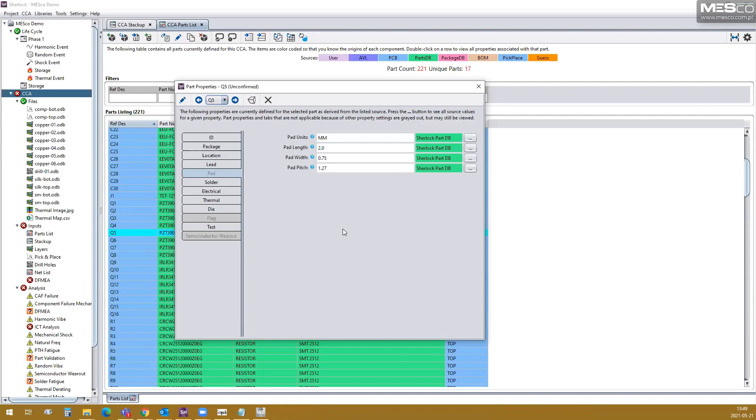And if you have a lead geometry, say, that nobody else has, a lot of times you can actually pick something close and then tweak the geometry to make it look like that anyway. And bottom line is, if you're not happy with that, then you can export it to Workbench and more closely define the geometry of your leads, and then you can run it that way. Then you get your strain levels, you pop it back into Sherlock with the post block, and then you can have all of your fatigue models applied to your stuff.

There is one additional, probably last question. Right. Yeah. The import PCB from Altium Designer. That is a good question. I should know this. It depends on how you can export with Altium. Basically, there are a bunch of different types.

We used ODB in this tutorial because it's one of the easiest and best importers into Sherlock. You can get CADIF files, IPC 2581s, GenCAD, Eagle files and stuff like that. Yeah, you should be able to export an ODB++ file from Altium Designer. We have a number of customers that use Altium Designer in Sherlock.